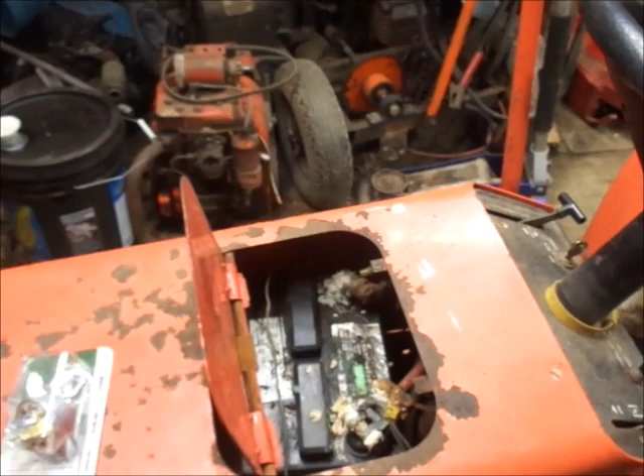So I'm going to pull the hood off, change the key switch, because I don't know if the terminals line up exactly. This key switch will work for this tractor, but I don't know if the letters match up, if you know what I mean. Like if the magneto's in the right place and starts in the right place. So I gotta look at that with the old switch.

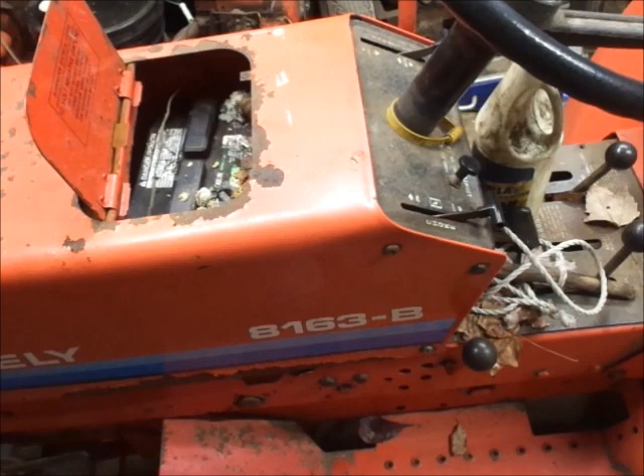And otherwise, really about it. I'm gonna check the oil and everything. This is my main spare blower tractor.

Basically, if something happens to the 16G, I walk over and I start this tractor and I get on and I start snow blowing. This tractor is not as fast, the blower is 6 inches narrower, but guess what? It'll still get the job done just fine.

This used to be my main blower tractor. First rider I ever bought that actually ran too. '83, bought it with the front drive kit and 40-inch commercial mower. God, that was 2012 when I started working, or 2013, one of the two.

But anyhow, getting off subject, but I used to put the cab on this tractor and all kinds of stuff. It's always been a good tractor. I've had very minimal problems with it over the years.

The only thing I have had go out on this was a starter solenoid, and I put a new fuel pump on it and an air cleaner. I've changed the oil a handful of times. I've changed the transmission oil a couple times.

The PTO clutch in this kind of drags, is the best way to put it. So you kind of got to be mindful, like if you want to leave it running and change attachments. I don't, because I know it does it, but every once in a while the PTO sticks engaged, just for a little bit. You give it 30 seconds, it'll pop out.

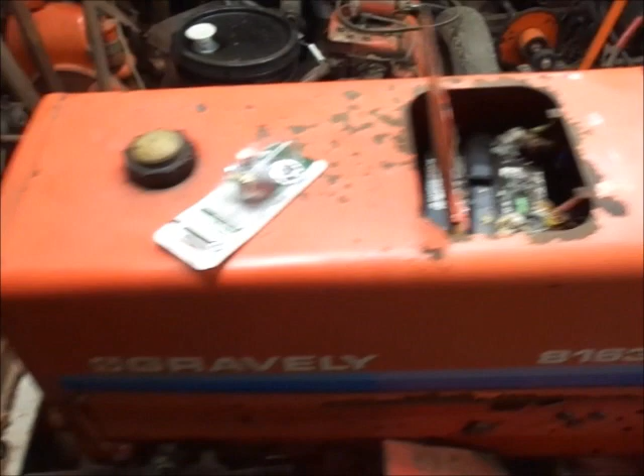Alright, got a mixture of Phillips and 7/16. Great, just great.

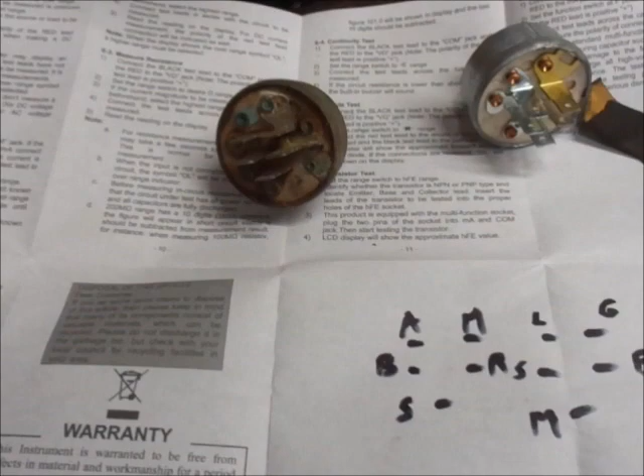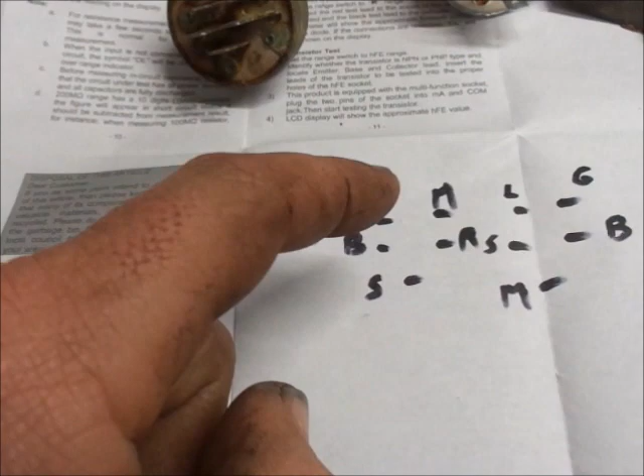So this is what I have to work with, and I just wrote this down on a piece of paper because it's going to be a whole lot easier to read than the key switch for you guys. On the old switch we have A, M, R, B, S. A is accessory for, like, say, headlights, or sometimes I'll put the voltage regulator to that. M is magneto. R is regulator or voltage regulator. B is battery, and S is start.

So, from there we go over here, and we have L, which stands for lights, G, which stands for ground, B, which stands for battery, S, which stands for start, and M, which stands for magneto. So, as you guys can see, they are different. They are like polar opposites.

So, in order to make this work, I'm going to have to switch all the wires around, and I got to see, because I'm assuming this switch does not pull ground off the case, which I'm assuming this one was, because there is no G.

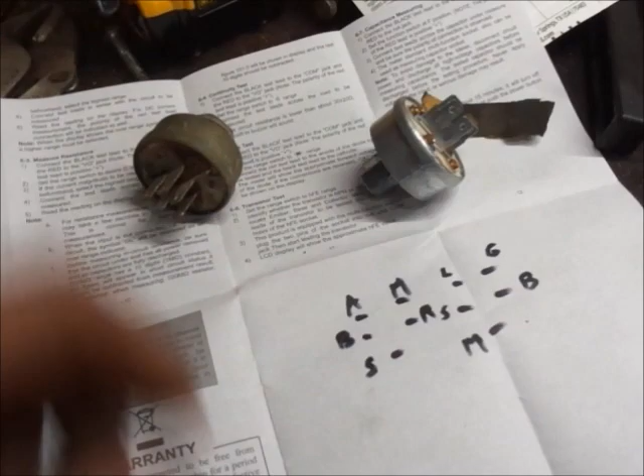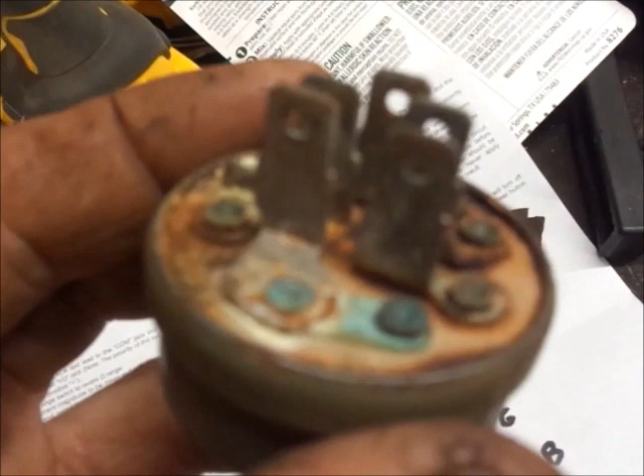But I've been looking it over pretty good because that is definitely... focus, come on, focus... I think you guys saw it for a second, but that is definitely an A.

Alright, hold on, I'm going to set you guys somewhere so it'll focus on this. A little more light on the subject maybe? Sometimes this blue light helps, sometimes it hinders you. Okay, you guys can see the A right there. If you look down through the center, you might be able to see the M. I'm not sure on that one.

Some of these are just hard to get in and read, being honest with you guys. You can see the R, I can see the R real clear. There you go, sorry my hand's shaking. There's the R. They're just hard to see with the camera, that's why I wrote them down for you guys. But guys, I'll kind of just have to take my word for it. I think you guys can see that one there.

Top right. Magneto. Yep.

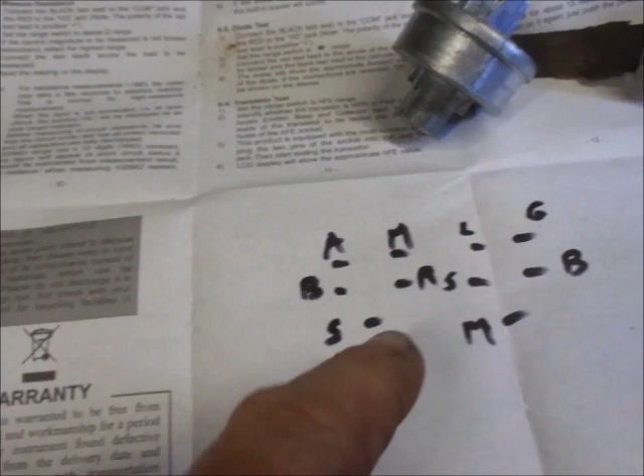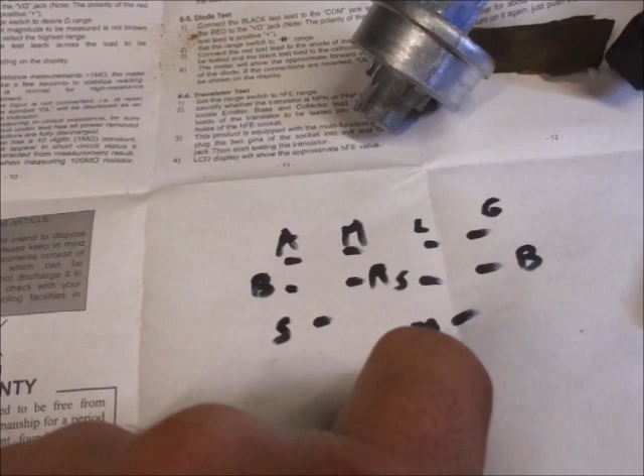So what I'm gonna have to do here is obviously the S needs switched down here. The Magneto I could probably actually leave alone because G for ground is fine, I think. Unless it's pulling ground through the case, and then that won't work and I'll have to go down to M. So I don't know, I'm just gonna have to play with it and see what it does here.

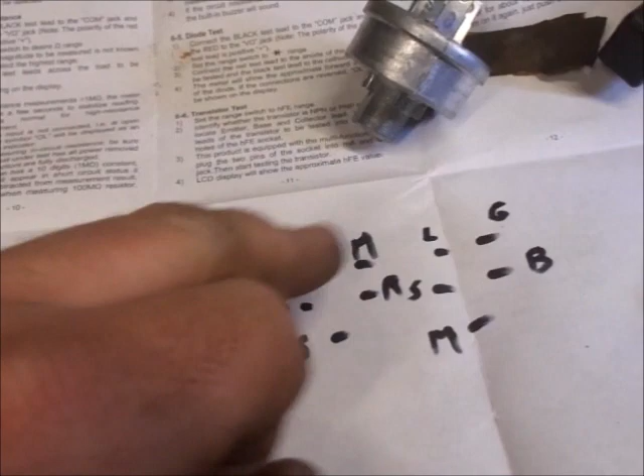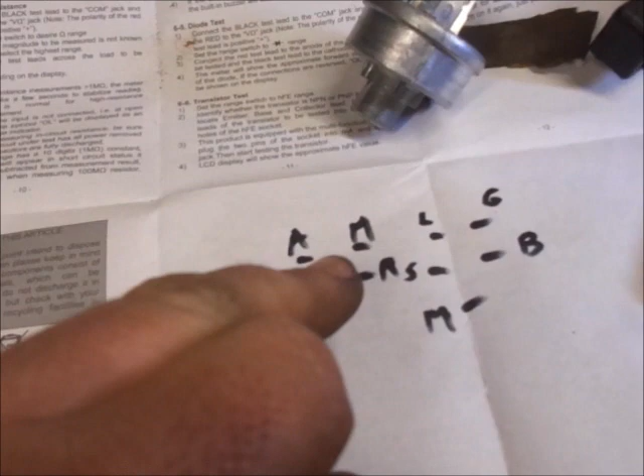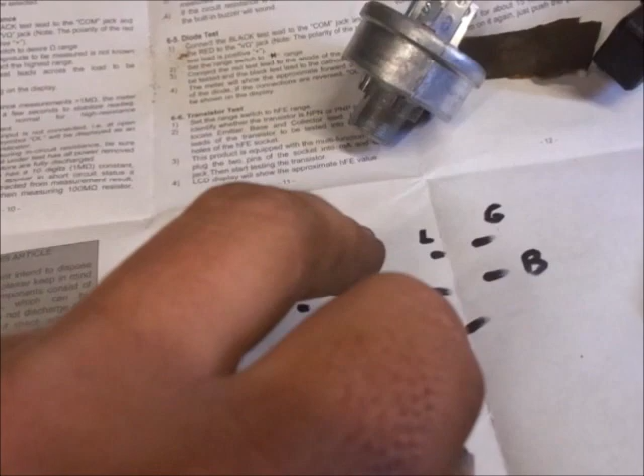But the S has to go up where the battery was. Battery has to go over. The A and L basically to me are the same thing, so that will not hurt. But I have to make sure the diode or the voltage regulator in this - this is a diode with a 3 amp trickle charge on a Briggs - I have to make sure that that is on the L here. B has to be B. So otherwise, it's plain as mud, right? Right.

So, because actually I'm only using 4 wires, and I'm not even using the accessory - no, I'm only using 3 wires here. Basically, all this key switch does is start the tractor and shut it off. So relatively speaking, it shouldn't be too bad.

There is just some little tabs. Basically, the tab is right down in there. If you take a screwdriver, a thin flathead screwdriver, and put it down in there, it'll release the tab, and you can pull it out of the back and put it where you need to. So I'm going to do that.

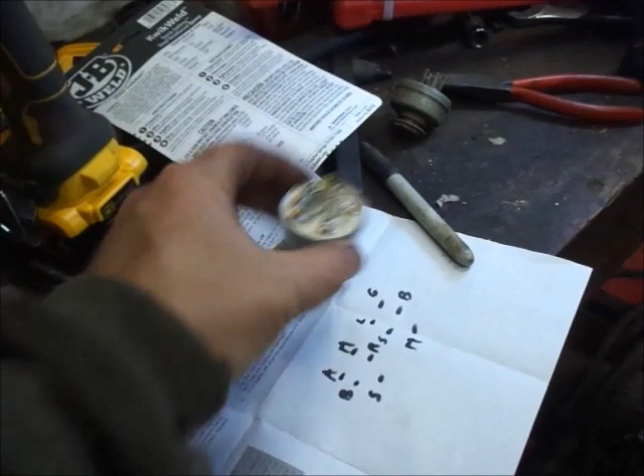And I might as well move the Magneto where the Magneto needs to be on this for this switch, just to make it simple, make sure it'll work. Worst comes to worst, I can add a ground wire and ground it to the battery or the frame right here, and go for broke and make sure everything works.

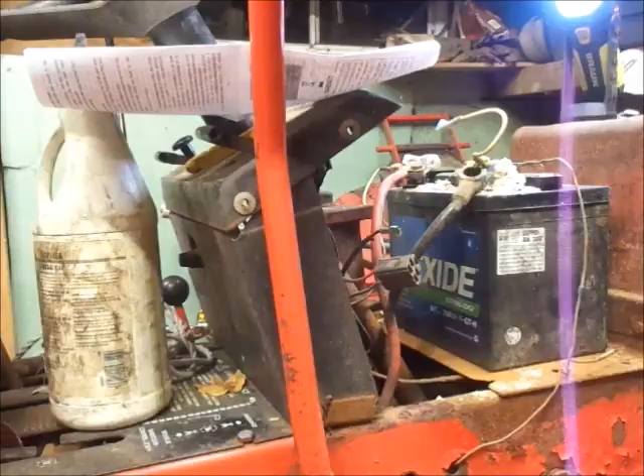So, I could hear some of you guys complaining in the background, so I figured there's only 3 wires, I'll just show you guys. But I already got one out.

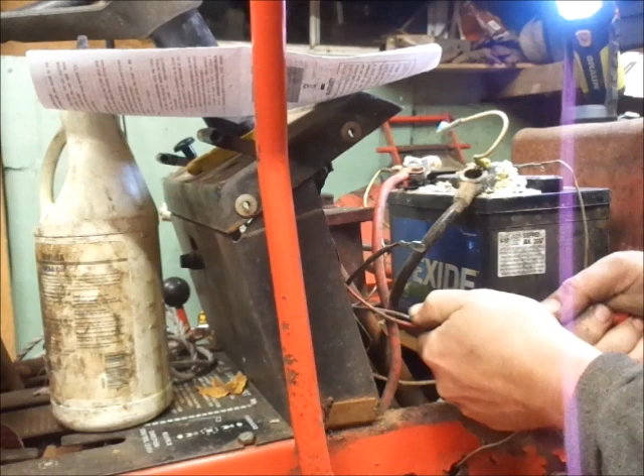Pretty much, hopefully you guys are in frame here, but see this little tab? That's all that keeps that from coming out of the connector. So what you do after you pull it out is bend the tab back up a little bit. When you push it back in, it'll go in and catch.

This one up here I got a little overzealous with. Hey, what's shorting the 2 wires together while the battery's still hooked up? Luckily I did that with the starter wire and the battery wire. See, this is why you're supposed to unhook the battery, kids.

Don't do like me. It's also why, generally speaking, I don't show you guys working on stuff, because you always get the comments, 'I can't believe you did it like that.' Look, I did it again. You think I'd learn from the first time? Nope.

So what we're going to do with the Magneto one is we're going to instantly put it back so we don't touch it to the other two.

So according to our handy diagram that I have laying up here in the dash, the Magneto goes to the lower plug, push it in, and they hook.

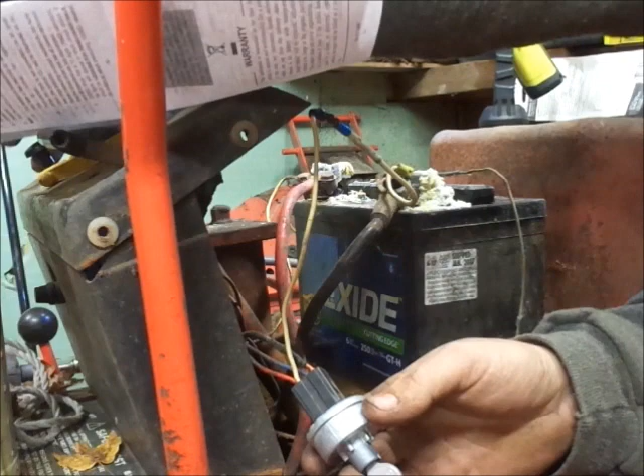Double check, but I have the headlights wired up direct to the battery from what I remember. Yep, headlights work. I don't know if it's charging or not.

I did buy a fancy new multimeter. I was actually out of Harbor Freight meters that didn't work. You guys know how that goes.

But basically at this point, screw her in the dash and we'll be good to go.

Before you guys ask, yes, I did clean up the battery connections off camera. Just not this one, the other one. This one works, don't touch it. That'll get you guys fired up.

So hopefully you boys will be able to see this. But one small miscalculation in my plan, it just doesn't fit.

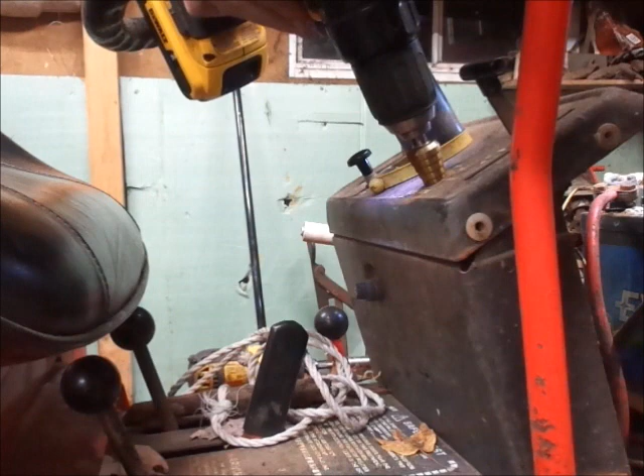Have no fear, I got a tool to remedy that. Just bought this. Not wound up in the ignition wires, huh? Oh, for Pete's sakes. Just needed a tip. Oh, ha ha, perfect.

I'm glad I spent the $10 on that. Look how easy that was. Where's my nut? Huh?

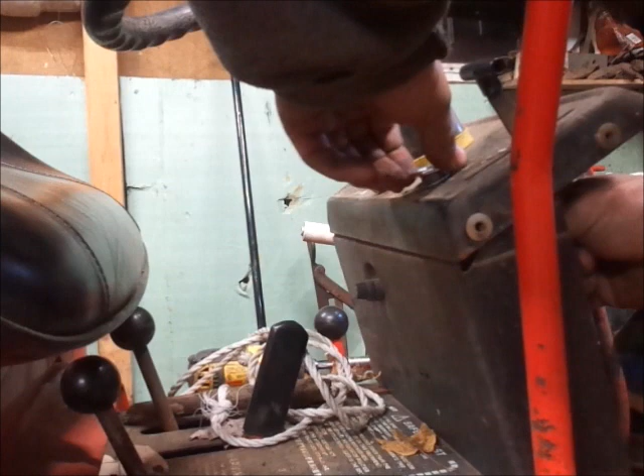So put the key straight up and down, pet peeve of mine. Do you guys like the air quotes lock washer on top or below? Leave it in the comment section.

The other switch, I believe it was below, but in all honesty, as long as it turns on and off and starts the tractor, I don't care.

And click, perfect. I mean you can triple check your work, but if really putting a switch in the dash made it not work, probably got some problems anyhow.

Beautiful. Alright boys and girls, put the hood back on and check the oils over and grease her up and be ready for another winter season.